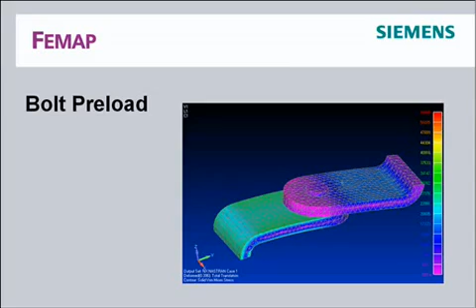We'll do a quick preloaded bolt demo here on this part. The first thing I'm going to do is set up automatic connections for this assembly, saying I want linear contact between all the parts and let Femap set that up. The next thing I'll do is tetra mesh everything in the model, and load up an existing material.

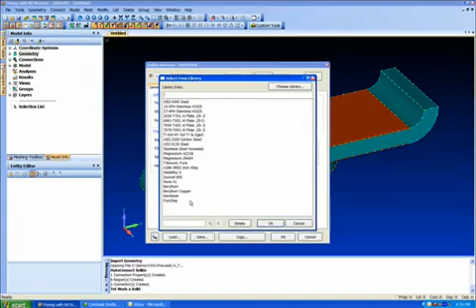Let me just grab an aluminum here and say OK, and let the mesher fly. Now let me turn off the mesh real quick and show you what's going on here. We've actually got a 4-part assembly, two of these outside pieces and two little things representing a bolt.

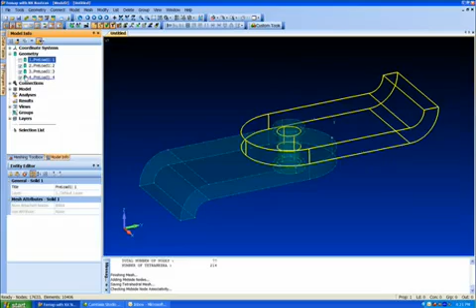So let me show you what we'll do here. Let's turn off that one and turn off the other one, and turn off the highlighting. Now I'm going to create a little rigid spider in here, so I'll go to our custom tools, meshing, spider surfaces. Let's create one on that one and one on that one. Some of the neat things, this is all 10-1 type functionality.

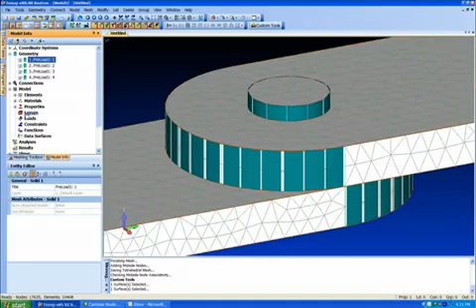What I'm going to do now is turn the mesh back on, turn the solids back on too. But just to get in there and take a look at everything, let's turn off the solid elements. I can turn it off by property, and turn off my geometry and my connections and things - those are my contact regions. Get rid of them as well.

So let's go in here, and I do want to turn the curves back on. I just want to make sure these nodes are at the center, so I'm going to do a modify, move to node. I'm just going to grab the center node and move it to the center of one of these curves here just to make sure I'm dead center.

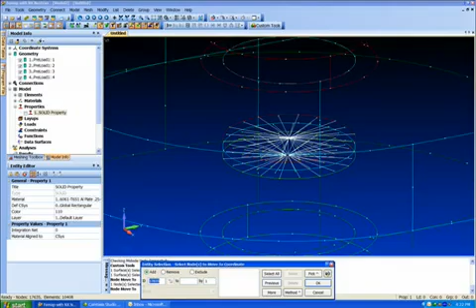Let's do the previous command, pick that middle node in the bottom here. I'm just going to zoom in, make sure I'm getting the right one, and then do the same thing here and update him. So I just wanted to get them right down the middle.

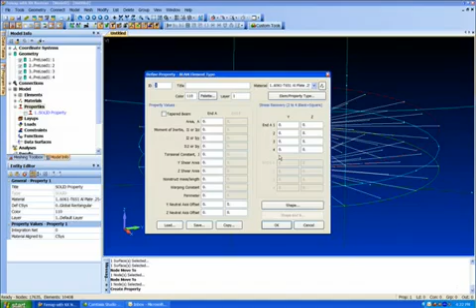So let's create a beam element. Preloaded bolts in Femap and NX Nastran are all based on beam elements. So I need to create a new property, and I want to make a beam property. I could type in all the values, or since I know it's a circular shape, I'll say circular bar, and it just wants a radius.

And great, there's my phone ringing. Let me put that on Do Not Disturb.

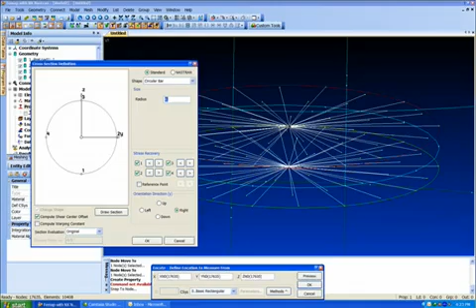Let me just calculate a radius here by measuring - Control D, I'm going to measure from this node at the middle to a node on the outside, and it tells me there's the radius, 375. I'll say OK, and let Femap calculate the properties for my fastener.

Just type in a title. So now I just want to create that beam element in there, from that middle node of this one to the middle node of that one, connected to the property we just made. I'm just going to align this beam with the global Y - since it's a circle anyway, it doesn't really matter a whole lot. Say OK, and now I've got my beam in there.

So at this point, I can put a preload on it. The first thing I want to do is create a new load set, and then create a load definition. I want to create a bolt preload of, let's say, 500 pounds. I'm just going to pick that element.

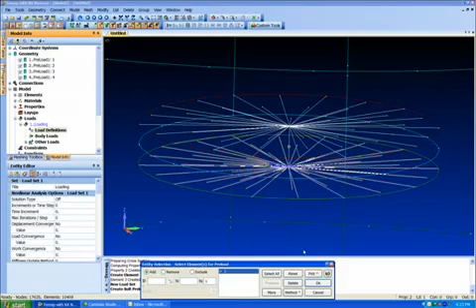What that's going to do is put that beam in tension, 500 pounds worth of tension, before it actually runs the rest of the model. So let's go ahead and clean up the display a little bit more here.

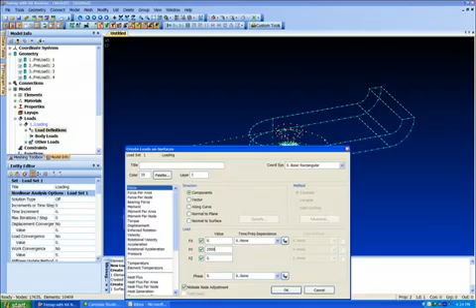I want to give just some loads and constraints on this guy. I can actually do it from here. Under loading, I also want to create a load on a surface, and we're just going to pull on this thing - we'll say 2,500 pounds in the Y direction - and then under constraints, I'm going to create an empty set.

And then here I want to create - oh, there's my voicemail - a new definition on surface, and just pick that surface down and fix it. So that's looking good there. We're loaded, we're constrained. We're getting closer to be ready to run here.

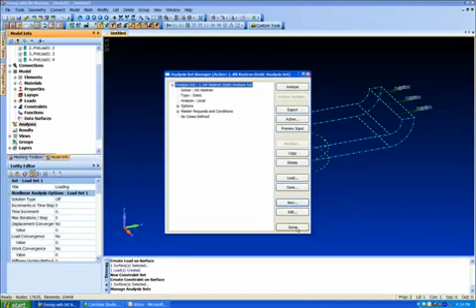Let's go create a new analysis. We'll call it NX Nastran. Linear static is fine, we'll say done. I'm just going to save this somewhere so that we can run it. This is fine, call it M1, and I'm going to hit Analyze and let this run.

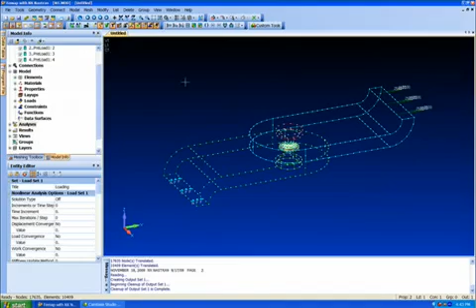Looks like Nastran's finished here, so go ahead and shut that down. Let's just turn everything off, turn the mesh back on, and we've got solid property turned off.

So let's take a look at this thing deformed, and we can see that it's definitely working there. It looks like things are in contact. Turn on the stresses - so that bolt did load up and hold everything together there and keep it all from sliding. It's pretty neat the way that thing works. So that's pretty much how you set up a preloaded bolt in Femap.